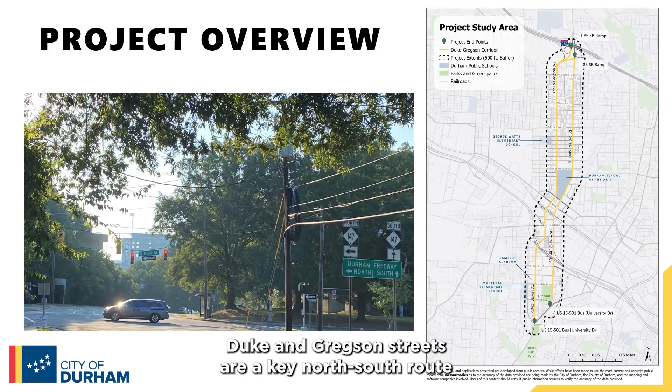Duke and Gregson Streets are a key north-south route connecting neighborhoods, downtown Durham, schools, and regional roadways. Duke Street, Vickers Avenue, and Gregson Street are part of what's called a one-way pair, which is when two one-way roadways run parallel to one another in opposite directions. The study limits for this project are from Interstate 85 in the north to University Drive in the south.

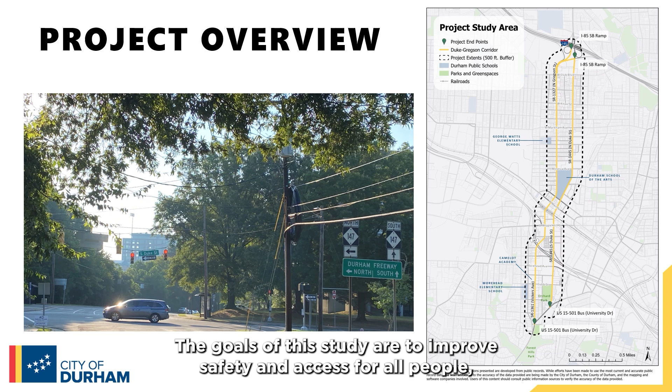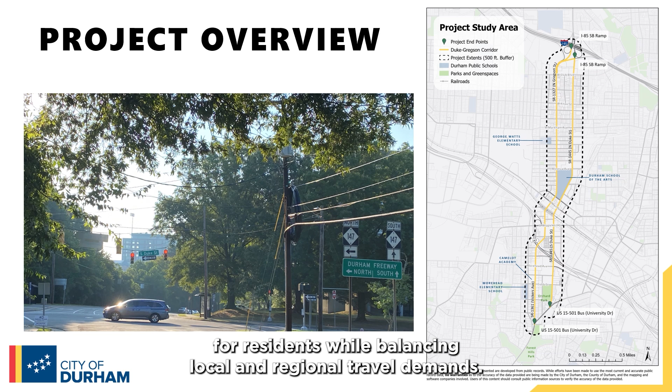The goals of this study are to improve safety and access for all people, whether they walk, bike, ride the bus, or drive. The project team is also looking at how these improvements on Duke and Gregson Streets can improve quality of life for residents while balancing local and regional travel demands.

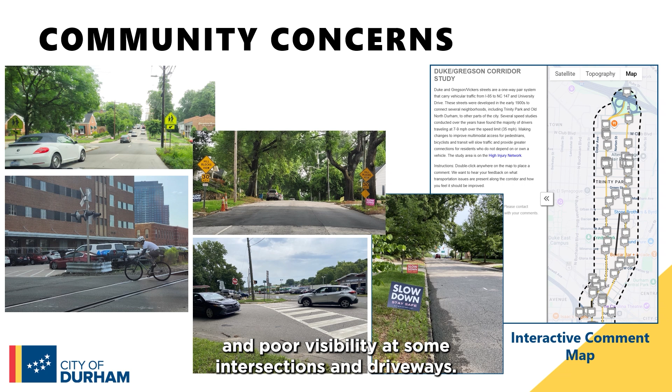Building on previous studies in the area, we launched an online comment map in April of this year and have received over 100 responses that highlight some of the main community concerns about these streets, including speeding, especially in the parts of the corridor that are neighborhood streets, wrong-way driving, limited bicycle infrastructure, gaps in infrastructure for people who walk, such as missing crosswalks and deteriorated sidewalks, and poor visibility at some intersections and driveways. Overall, these concerns represent underlying safety issues that need to be addressed.

Since the Interstate 885 East End connector was opened in 2022, the number of cars on Duke and Gregson Streets has greatly decreased. At the same time, the demand for more walkability, bikeability, and access to bus service along these streets has risen. The City of Durham initiated this project to address this changing landscape.

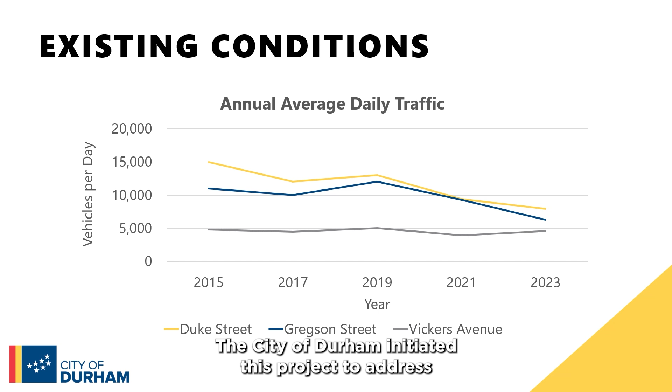In the past 5 years, a total of 845 crashes were reported along both streets, including 3 severe injury crashes. Additionally, 55 crashes involving a vehicle and a person walking, and 24 crashes involving a vehicle and a person biking have been reported along the corridor in the past 18 years.

Duke Street, Gregson Street, and Vickers Avenue are also included within the City of Durham's high injury network, which includes the 10% of streets that make up 74% of all fatal and serious injury crashes in the city. This designation indicates that there are underlying safety issues along these streets which require us to put effective safety measures in place.

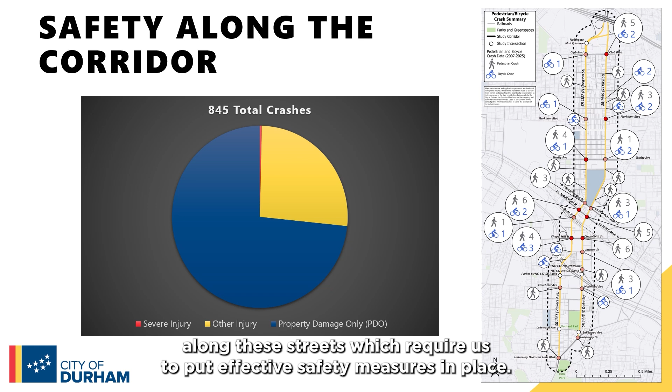Currently, the project is examining 2 potential alternatives to the existing one-way, 2-lane cross-section. Alternative 1 would keep one-way traffic on Duke and Gregson Streets but repurpose one travel lane for other uses, such as additional on-street parking or protected bicycle lanes. Alternative 2 would convert Duke and Gregson Streets to 2-way traffic, with each street having 1 lane in each direction. This alternative is expected to maintain existing on-street parking along both streets.

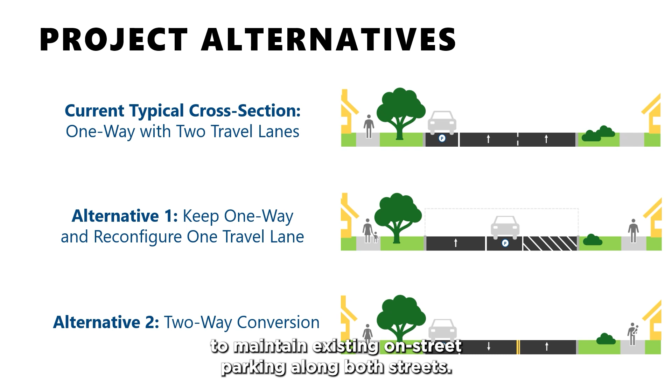While the focus of tonight's meeting is on identifying the preferred alternative for the roadway, the project team is also looking at other potential improvements. These additional improvements may include reducing the speed limit along the corridor, adding traffic calming features such as curb extensions and narrower lanes, adding and improving mid-block crosswalks and bus stops, as well as proposing quick build and pilot project opportunities, where the city would use low-cost materials such as flex posts and paint to address safety issues as soon as possible.

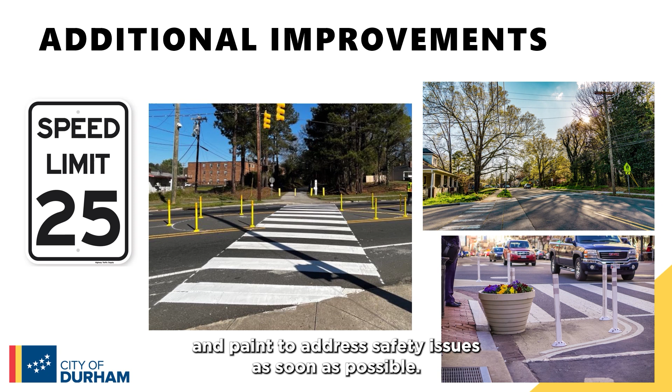The project team will collect and evaluate feedback from tonight's open house, pop-up events hosted around Durham, and an online survey and interactive comment map. Early next year, the project team and the City of Durham will recommend an alternative cross-section for both streets and identify other safety improvements. The team will also develop cost estimates and conceptual designs for the preferred alternative. The project is expected to be completed in spring of 2026.

As you leave the area where you are watching this presentation, you will be invited to move through the next 3 stations at this open house and interact with project staff. Station 2 will provide an opportunity to review existing conditions of the streets in more detail and note any concerns or themes that we may have missed. Station 3 presents the cross-sections of the proposed concepts to improve the corridor. You will be able to talk with staff about the concepts to better understand how each concept could improve conditions in the neighborhood surrounding Duke and Gregson Streets.

And Station 4 will be a place for you to follow up with any questions for our team. Station 4 will also show you where you can take a survey here in person or on the project website to leave your detailed feedback on the concepts for improving Duke and Gregson Streets.